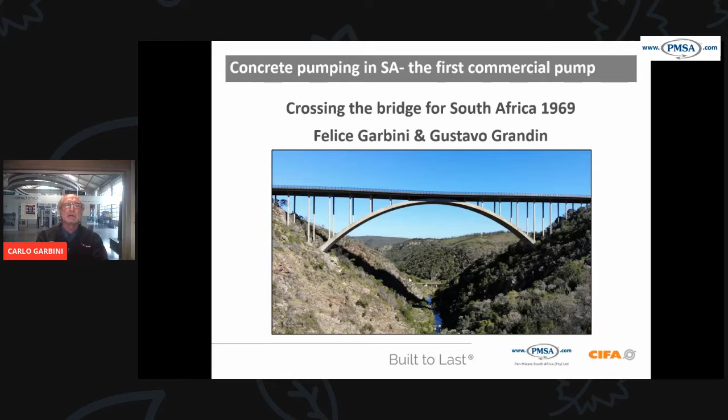Mr. Garbini and Mr. Grandin were busy with this construction river bridge outside Port Elizabeth, a very famous bridge, used to be used in the PPC advert many years ago. And this is where it all started because the concrete pump was on the bridge while they were building, and Mr. Garbini Senior, my late father, picked up the idea and decided to form a company in 1969 called ITIL Service in Johannesburg, and commercial concrete pumping was born.

There we go. So 1969, very first pump in Johannesburg, and very, very archaic, antiquated, primitive ways of placing concrete those days. Machines were just starting out. And even though in Europe they'd been pumping concrete for about 20 or 30 years already, the machines were still very undeveloped there. So the result is that there's a lot of pioneering work for the poor guys.

These two engineers, Mr. Garbini Senior and Mr. Grandin, two brothers-in-law, set out because Mr. Grandin then left the Van Stadens River Bridge to join ITIL Service in 1969, 1970, and they started this whole concrete pumping operation in Johannesburg. As you can see, the very first pump, very small, 15 cubic meters per hour, which, I mean, it's really small. You don't get machines like that anymore, but that is how they started out.

And then the very first boom pump came along in 1970. 17-meter placing boom. For those of you who don't know about concrete pumping, the placing boom is the one that places the concrete, and we'll get to it later in the program. And 30 cubic meters per hour delivery.

Having said that, you can see on the slide that in 1970, at the old LTA Killarney portal, these two gentlemen, together with a third pump operator, did a pour of 1,800 cubic meters non-stop for 34 hours using 3 mobile concrete pumps, with booms of very early designs. Now, just stop for a minute and think about that.

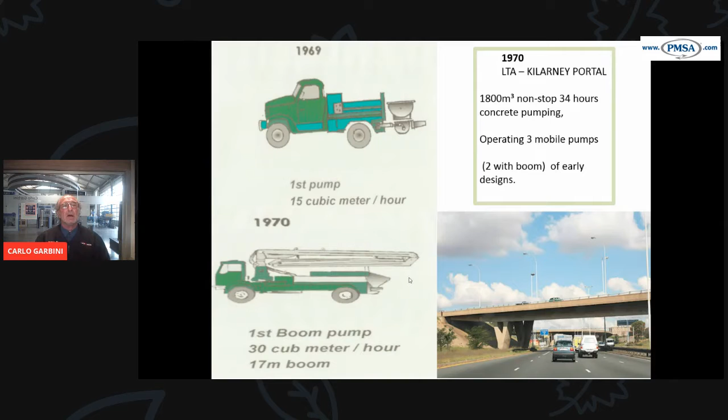Another interesting fact, so long ago, these were specialist guys at a specialist company called Etal Service at the time, which eventually became part of Pioneer Concrete, which eventually became part of Alpha Stone and Ready Mix, eventually became part of Holcim, eventually became part of AfriSam, the pumping division.

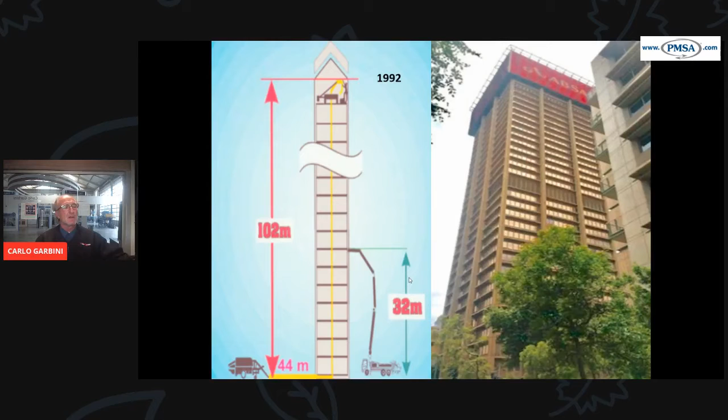So moving on from that operation, something I personally was involved in back in 2002 was this Mandela Bridge in Braamfontein. Another very interesting project where I was called. I've done quite a bit of work in America already on special concrete pumping applications, and this bridge that you see here was quite tricky because we had to pump the pylons vertically, and there's a railway station, that's Joburg railway station at the bottom, and you can see that putting pumps under here was a no-no.

We couldn't put a pump on top because of the weight of the machine, which was 30 tons, and we couldn't put a pump underneath. We could divert the trains to a point, but then we had to try and get to the top here, right on top, and put concrete from the top, which was also quite tricky. So I met with engineers at the time, and we said, look, let's try something that I did in America, where we pumped from the bottom.

And what we did is we put the boom pump away from the site on this side, and we ran a pipeline on the deck here, and we put a special valve at the bottom of these pylons, and we pumped it vertically. This was new to South Africa back in 2002. So we put a special valve, and we poured the first one, very special lightweight or flowcrete concrete, very flowable concrete design, and we pumped from the bottom up.

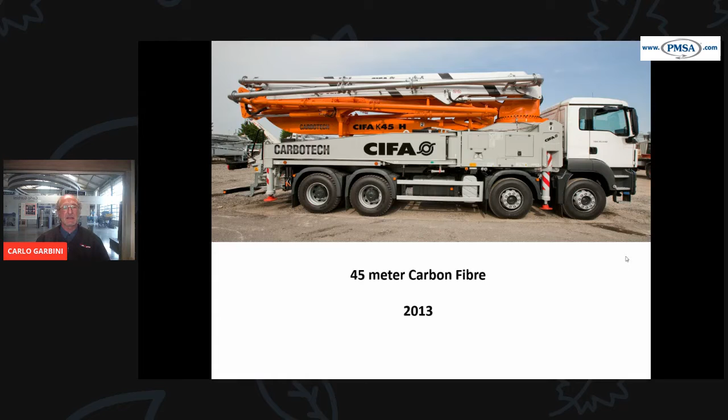This was released in 2013, and there's been more development since. It's now gone to 47 meters, and we have big boom pumps which reach even 80 or 100 meters in some parts of the world. I don't think we have the market for that at this stage, but who knows? Maybe in the future.

So the industry of concrete pumping has a whole lot of challenges and opportunities which exist, and we can talk about that now, where things have changed tremendously in the last five years or so. And what's happened is basically that the economy has contracted. We had a great economy right up until the 2010 World Cup. Then a little bit more to like 2015, right? And then it's been a bit quiet, and it's been rather restricted the last few years.

And the large companies are gone. The big companies we all know, the big construction companies, most of them have folded. There's a few left, but the big guys have closed. So this has had an effect on the smaller players and suppliers.

Why? Because it means that they've got to gear up, and they've got to try and keep up with this type of projects. Also, new projects are limited.

We know that the government needs to do a lot of infrastructure development in this country. You can see there that a few years ago there was 100 billion to be spent over the next decade. And then there's 526 billion to be brought into the private sector development finance as well. And this is growing. We find there's a lot more to be done here. And we hope that government and private sector can get this going.

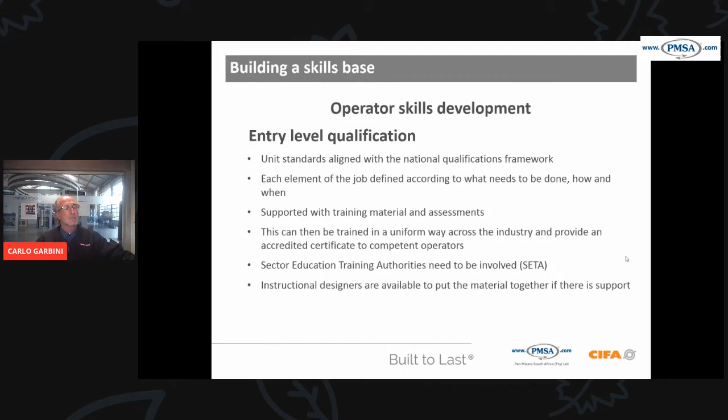So we now have the different types of equipment, and you can see how things have changed now. On our side, on the CIFA side, we have these three ranges of equipment. CIFA is a very big company. They've been around for 90 years, and they have made a beautiful, very efficient and economic range of concrete pumps.

From a classic series, which is the economical line, the Steeltech series, which is their normal line, and then a very fancy carbon fiber series for high quality markets and high quality operators. And we can see that there's a whole range from 38 meters and 41 meters on the economy line to a 20 meter right through to a 58 meter on the Steeltech line. And that is where most of the work happens, is in the Steeltech side.

And for countries that need economical machines, we use the classic. And then for a lot of European countries and high quality countries where standards are very high, we have the carbon fiber series, which goes from a 39 to a 45 to a 62 to an 80 meter, and that is being developed every year as we go along. Yes, so nice range of products, and we're always very keen to demonstrate.

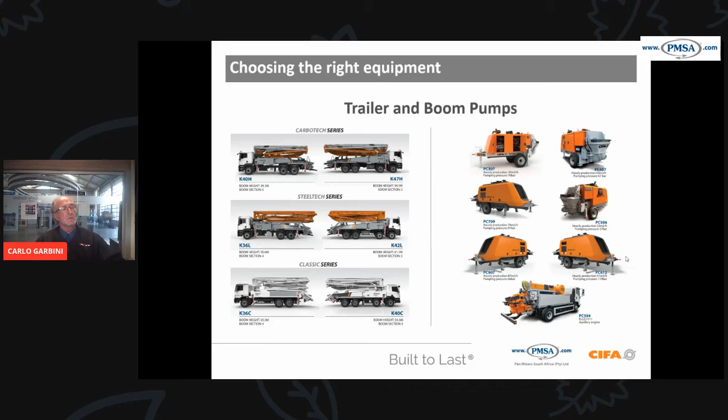Okay, so for those who are into the latest technology and people who would like to have a look at carbon fiber booms, you can see there that we have a 25% weight reduction for the same length of boom. But we also get a 20% increase in length. So that's quite a number. I mean, we have these big advantages here, and we find that sites nowadays are getting more and more demanding. They want bigger and bigger booms.

We're getting requests now for pumps in the 52, the 55 meter region, and that will be the future. The future is going to be bigger pumps. And the interesting part is that we need obviously lots of concrete work for these big pumps because the pumps are expensive, and we need to be able to ensure that an expensive piece of equipment like that is going to do the job efficiently and cost effectively. So I can see that in the next few years we're going to be running these big pumps, especially with these big projects that are coming up.

I mean, there's some very interesting building projects here in Gauteng, housing projects, not necessarily for big booms, but at the same time there's going to be high-rise again, big high-rise buildings. I understand there's going to be probably more power stations and more bigger projects.

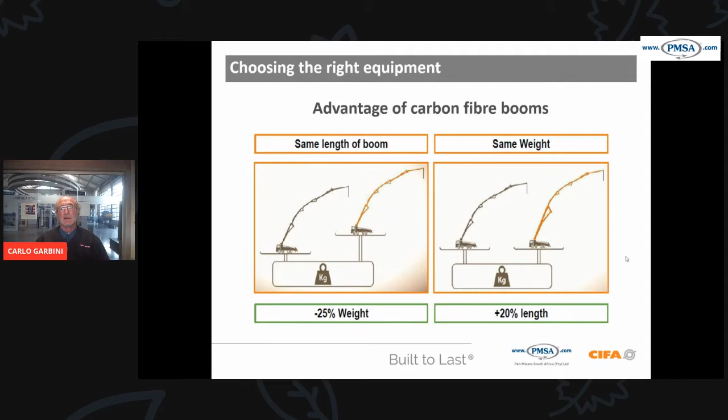In other words, they run the machine, they run the pump, they know what's best, while the owner is busy getting contracts and doing the wheeling and dealing with clients, with the concrete guys, but he's not really that clued up with the pump. And he leaves it all in the hands of the operator. And the operator can be very good, it can be very poor.

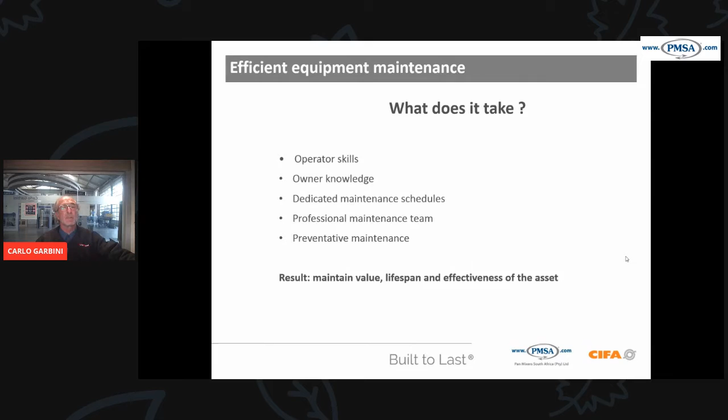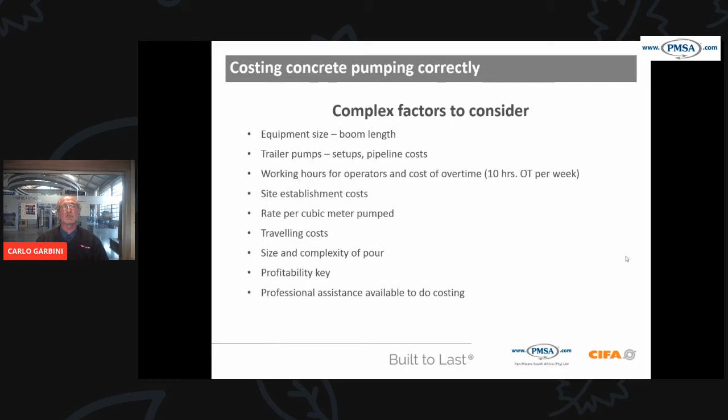Okay, so here's the next challenge we have, guys, ladies and gentlemen. I can't see you there, but I assume there's ladies and gentlemen in the group.

And this is a big challenge. This is going to continuously be a challenge. This is one that doesn't go away, unfortunately. Concrete is becoming more and more challenging to pump. Why? Because as the world changes, as the environment changes, as the projects change, as the concrete itself changes, and it's got a lot to do with the environment and a lot to do with what clients want. And cost, obviously, is always a factor.

So the client might say, I only have this budget to pump concrete, and this is what I'm going to pay. And then the ready-mix company will say, well, I can give you concrete for that. And the pumping guy comes along and he says, but hang on, my concrete pump doesn't want to pump this concrete. And the ready-mix guy says, but why? You must pump this concrete. And the customer says, I want that concrete to be pumped.

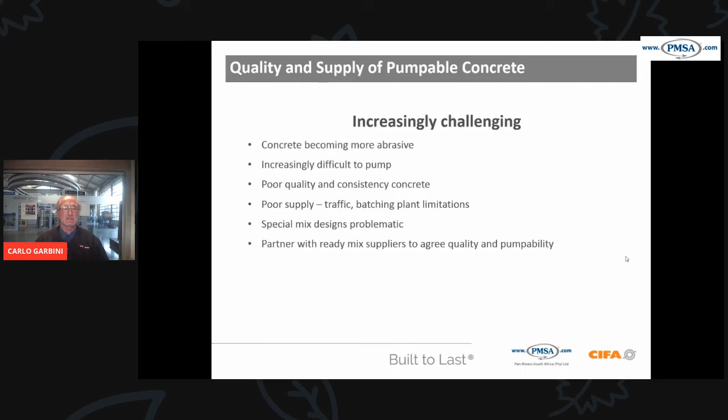I see it a lot where concrete changes from truck mixer to truck mixer, and it can be very, very difficult to control that. But that's why we're here. We're here to train the operators of the pump. We're here to train the operators of the ready-mix companies and construction companies how to handle all these ups and downs. Moving on.

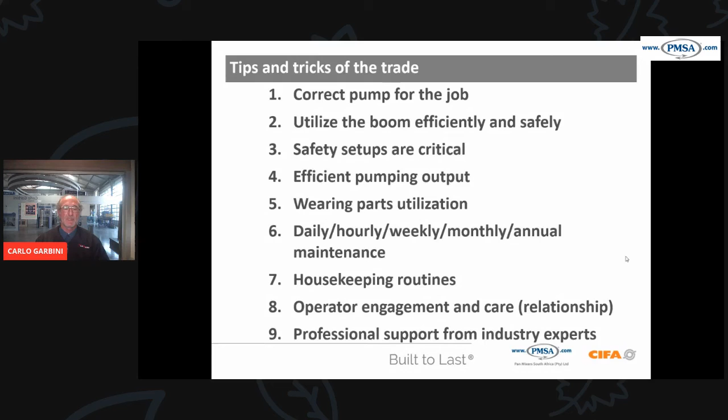Wearing parts: you need to know how to use them properly and how to adjust them. Daily, hourly, weekly, monthly, annual maintenance. Always a problem; we spoke about that before. Preventative maintenance is very, very important. And there are maintenance sheets and schedules available, which I could assist operators with. Housekeeping routines, obviously. Operator engagement and care relationship, very, very important. And professional support from industry experts like ourselves. That is where we are on that one.

Okay, so we're almost at the end here, where we have questions, which I will answer at the end of the presentation. Once the presentation is over, I can see the questions coming up here. So let's have a look while we're here. I'm just going to go across to this screen here. And the very first one, there we go.

So I have Chinandam, and he asks, who are your competitors in South Africa? How do you see your system integrating 3D printing, which I believe is an inevitable route in the near future? Okay, so Chinandam, we have 2 or 3 European competitors and 2 or 3 Asian competitors who manufacture equipment, and we're all part of the same groups, funny enough. We're all interconnected, even though we compete. On the one side, we compete, and on the other side, we're part of big groups.

There's definitely a future for 3D printing. We know that, and we know that this is a project on the go, and with time, there's going to be equipment that's going to be 3D printed. There's no doubt about that. Even concrete pumping is going to become a 3D printed operation. I've already seen videos and heard about technologies being developed in certain parts of the USA and Europe. It's going to be very interesting to see, and we'll see that as we go along.